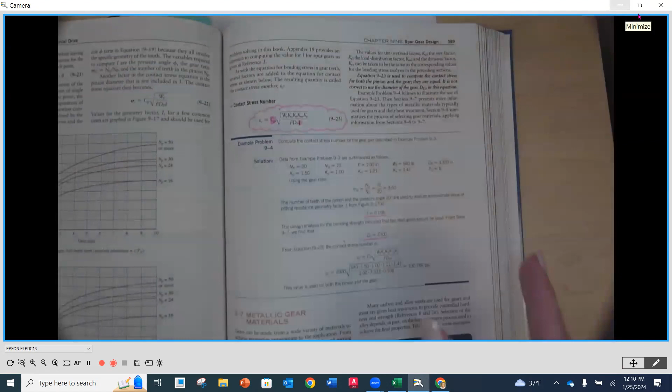Okay, and here's where we're starting, like I said, on page 389. Now 389 is where we have example problem 9.4, and example problem 9.4 is going to continue from example 9.3.

Example 9.3 looked at calculating the bending stress for the example that was started there. We went through different tables and charts, filling in the numbers specific to the application they described.

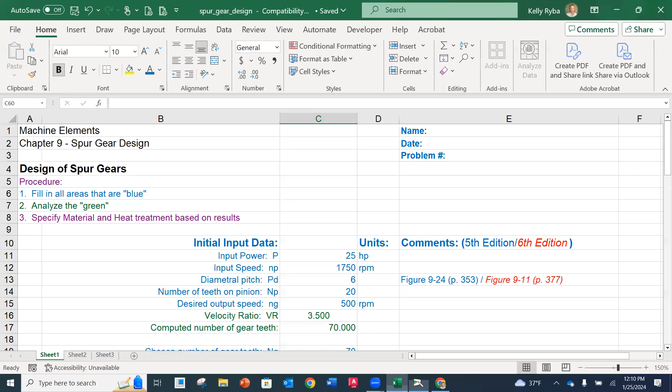We found on our spreadsheet, I'm going to bring that up here, the values we filled in in blue. There are some still open that we will go back and fill in as part of this, but right now we know what our bending stress is.

Remember, the bending stress on a gear tooth is due to that tangential force pushing on the tooth, transmitting that force from one tooth to the other. It's like that tooth is a cantilever beam wanting to push over. We need to know what that bending stress is so we can make sure our stresses aren't too high for the steel material we're going to use.

So first we have to calculate these stresses. We've got our bending stress. Now what we're going to do is find out what the pitting stress is for the same application. Remember, these two stresses are the big deal we want to know in gear design: what is the bending stress and what is the pitting stress.

Now, last time we talked about why I want to know these two values. I'll look to my chat to see if anybody puts anything in there, or if you're virtual, you can just yell it out if you want. Why are we interested in these two stresses?

Yep, they cause wear. Now wear is considered what? Starts with an F. I'm asking you to fill in my sentences, or think like I think. Not fatigue, not force — failure.

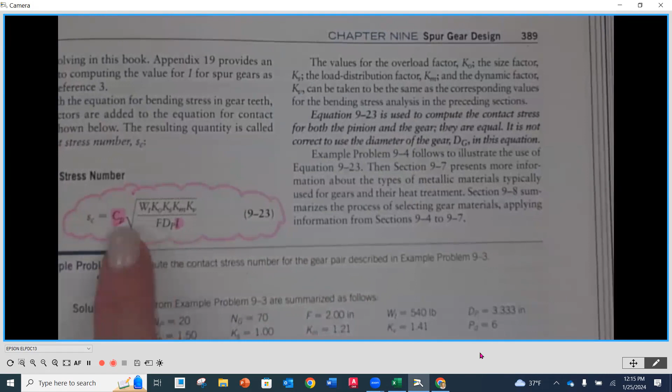We're going to be looking now at the stress caused by the contact, or what's going to be causing pitting on that surface—that's what example 9.4 is. Now going back underneath, right before this problem they have the equation for that pitting stress. You'll notice most of the variables there we used for bending, so the ones I don't have highlighted we've already been looking at. This stress C is called contact stress, but they also refer to it as pitting—pitting and contact stress are the very same thing.

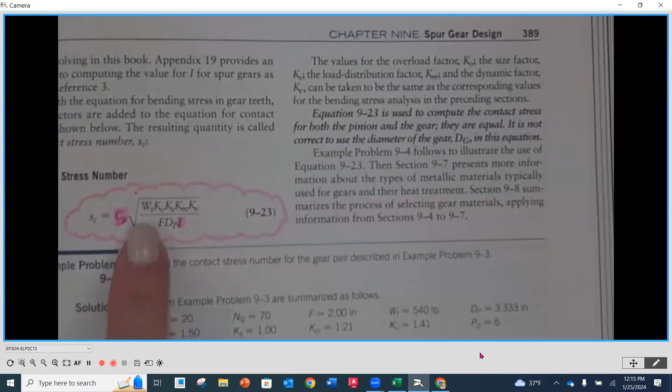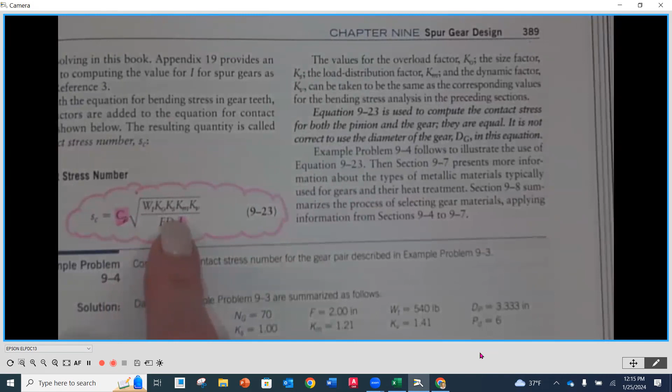WT is going to be that tangential force—that's the one pushing on that surface each time as it engages with that tooth and transmits that force, so that's part of what we're interested in. KO is an overload factor, size factor. The M was the... not the dynamics factor, that's V. The M, K, load distribution. Thank you very much.

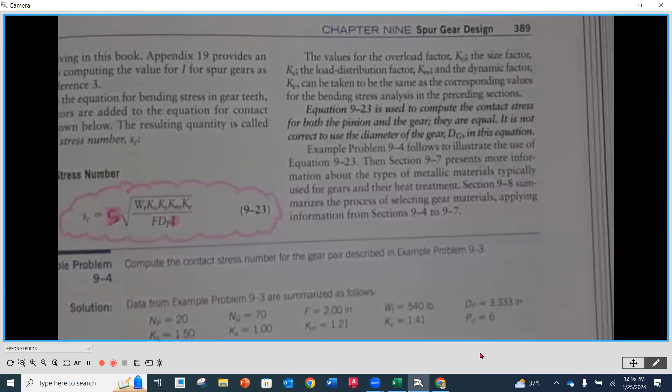Now underneath we have capital F—do you guys remember what capital F was? It was the face width. So face width is going to be that line for which we're going to distribute that WT, that tangential force. So the wider that tooth is, the less stress we're going to have. We're going to find out that as our teeth get larger, or that diametral pitch gets smaller, we widen out that face width, because we're distributing that force over a longer distance. And then you'll notice down here is that pitch diameter as well.

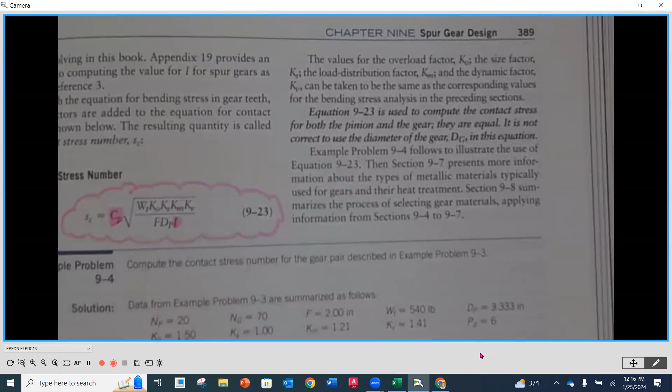So the two values here that we haven't encountered yet are CP and I. I is called a geometry factor—this is going to be one for pitting stress. We're going to read this off a chart, and it's actually going to be read off of a chart that's on the very previous page here.

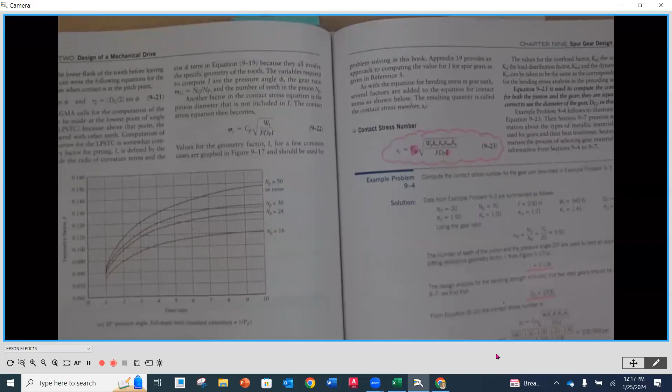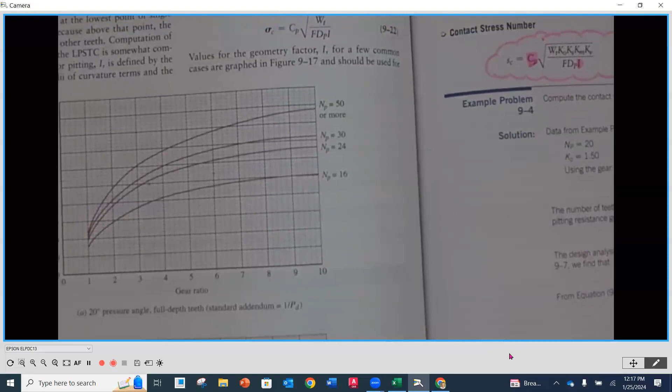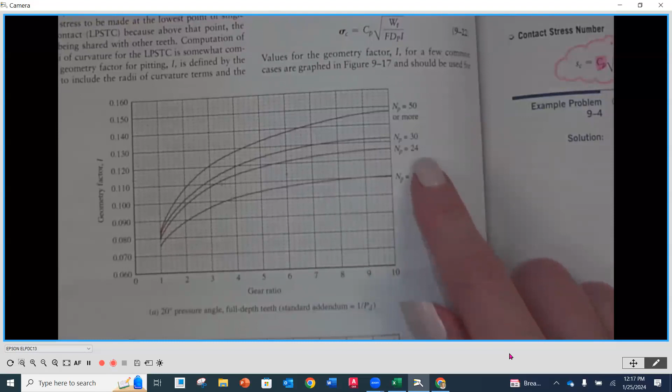On page 388 you'll notice we have two charts—the top one here is for 20-degree pressure angles, the bottom is for 25, so we're going to focus on the 20. To get this value for the geometry factor I, we need to know what the gear ratio is on the bottom here, which is part of what we calculated in the top portion of our spreadsheet. And then we need to know the number of teeth on our pinion. They don't have every one, so you'll have to interpolate—but for instance, for 16 teeth, we line up our gear ratio, find that intersection, and read our geometry factor.

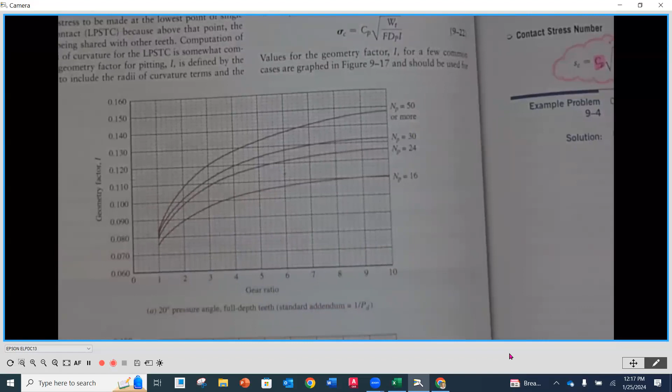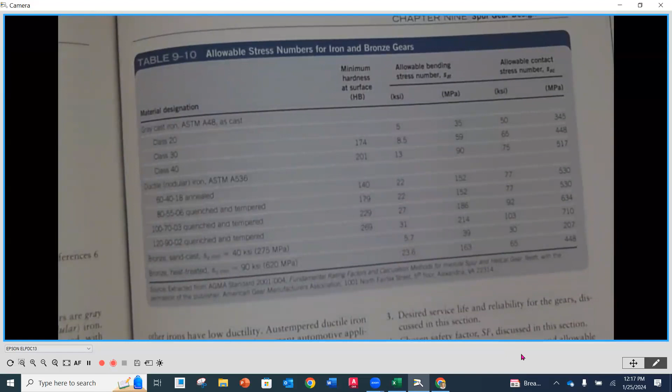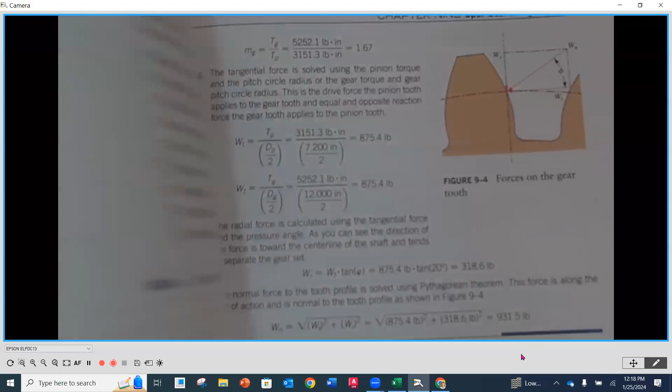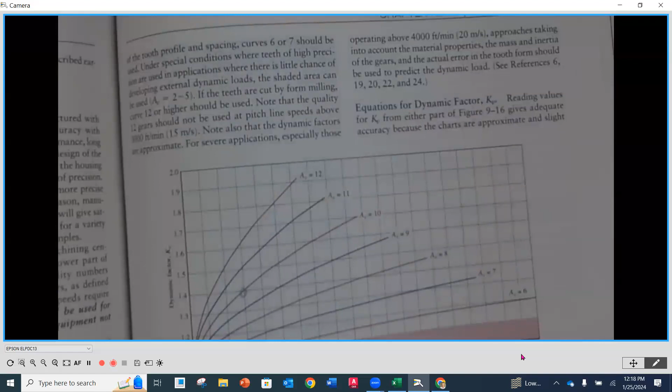Now CP is going to be a value based on the materials used for the gears. I don't know what the chart looks like, there's so many charts in here. The CP value—hold on, it's a little further this way. I wish they would just have a section where they all were, but I'm pretty sure it's 387. Down on the bottom—yep, there it is.

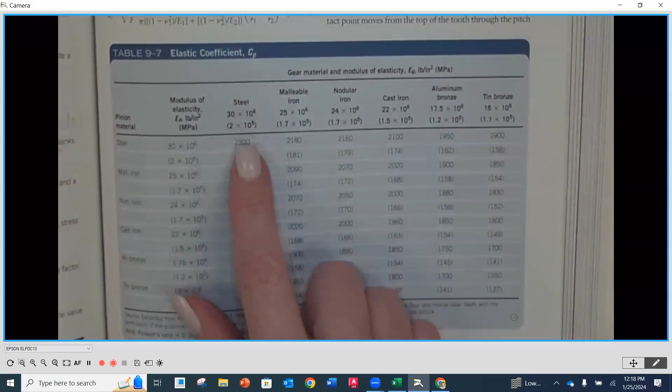So this is called the elastic coefficient, CP. What we do is find the material of our pinion—in our case we're going to be working with steel gears—and then we find the gear material of the gear. So where those two come together, steel and steel, we're going to be using that number.

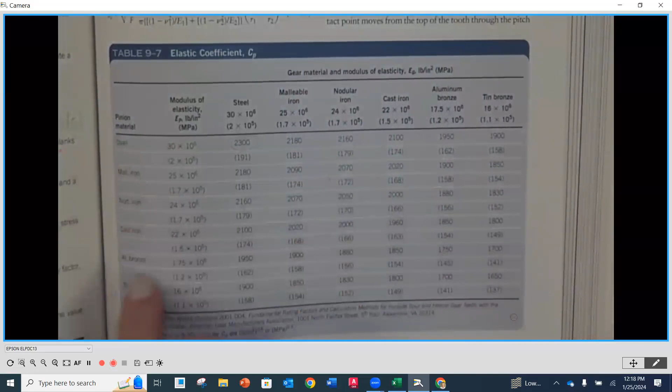If you had different materials coming together, or different materials in general, this number would change. Ours is going to be 2300 because we're assuming steel gears. So that's going to be the CP factor.

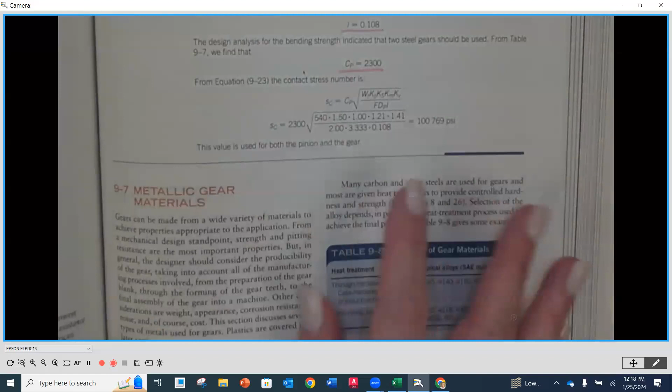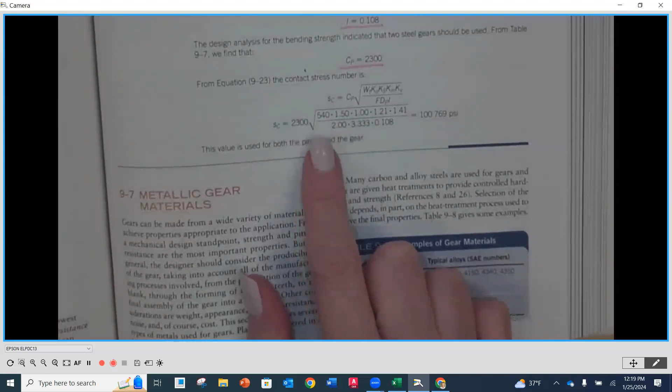You'll notice we just have a couple more things to fill in on our spreadsheet, and then we'll be able to find our contact stress. Let's go to this example and see where we're at.

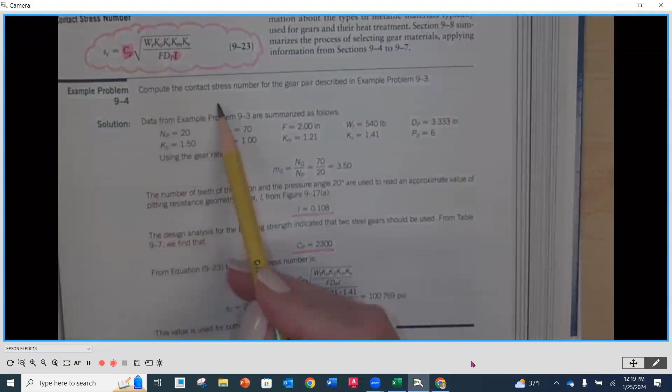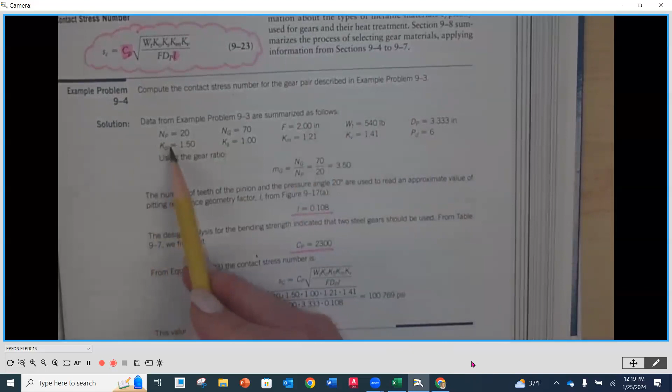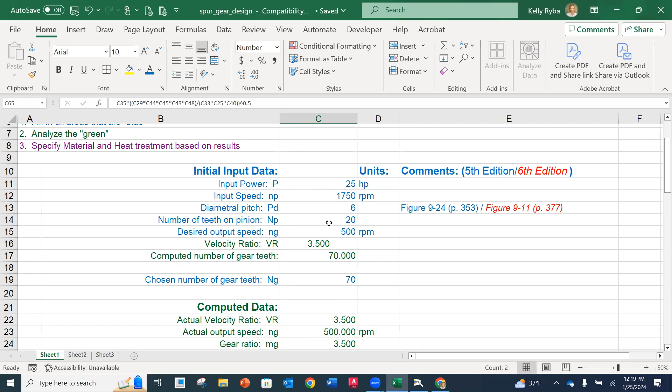It says compute the contact stress for the gear pair described in problem 9.3, and they have the data we collected from 9.3 here, so this is all familiar. If you didn't save your spreadsheet, you're going to want to fill these values in, the ones we did from yesterday: our horsepower, the input speed, the diametral pitch, number of teeth on our pinion, and so on—anything that's in blue here.

The ones we need to add are the I and the CP, and also our AV number, because we might have added that yesterday, I forget. It's 10, right? Because that was given in the original problem. So if you don't have it, put it in there.

Now CP, as we saw earlier, I'm just going to review—we have two steel gears, steel on our pinion and steel on the gear, so it's 2,300 for our CP value.

And then we're going to go down to I, the pitting geometry factor, and we're going to use that chart on page 388 to find our value. We need our gear ratio and the number of teeth in our pinion. Going back to the computed data, our gear ratio is 3.5 and the number of teeth on our pinion is 20.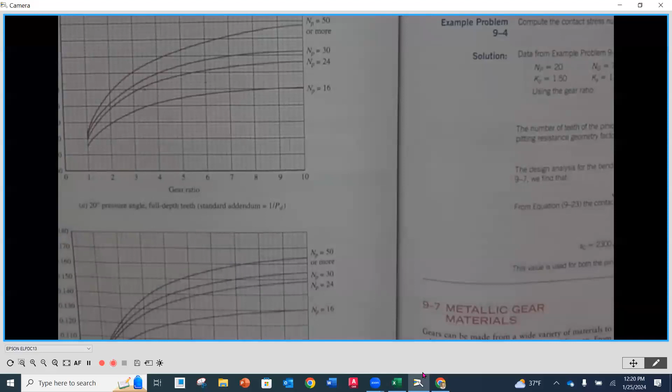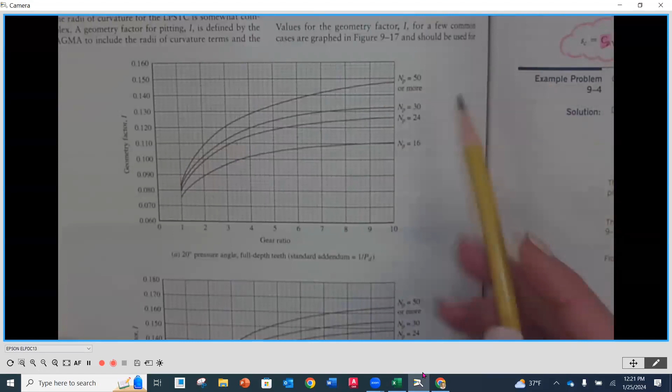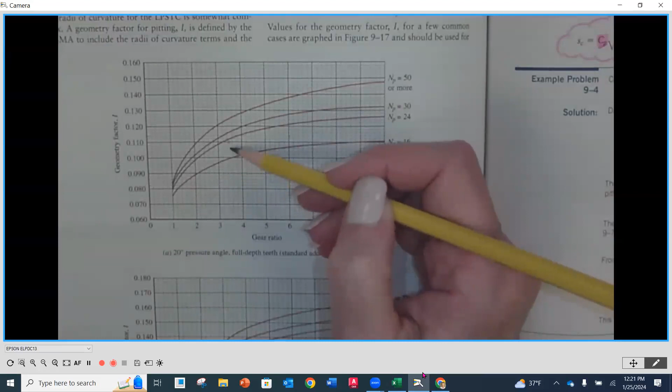So we're going to go back underneath here and fill it in, finding it on our chart. We're going to find where 3.5 is in between here, and go up—well, 20 isn't on here, right? So 20 is below, or in between these two, probably right in between. So I'm going to follow both lines down, and where I get to about 3.5, right about here in the middle. Then we're going to go over, and it's going to be right about here. So if we look, that's going to be 2, 4, 6, 8, 10.

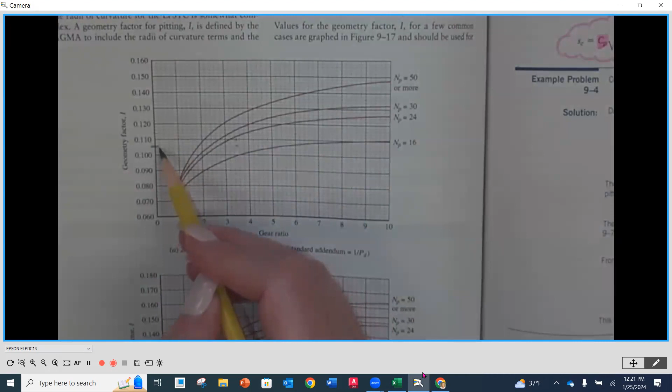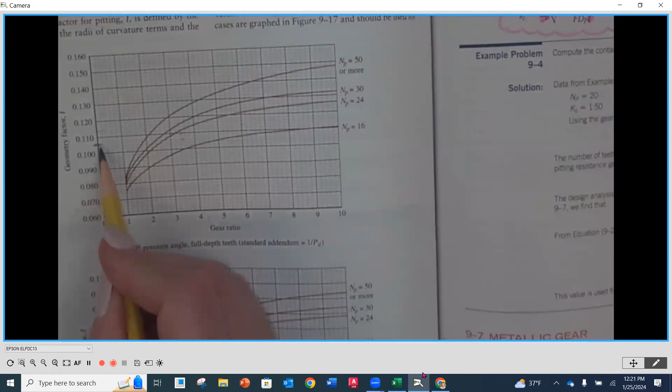0.125-ish—let's see what they used here. Oh, I'm sorry, 0.108. Let me see—oh yeah, that makes sense: 0.1, then 2, 4, yeah, 8. That's what they picked, so 0.108. I was going to the 100th place instead of the 1,000th. So in my spreadsheet, under I, 0.108.

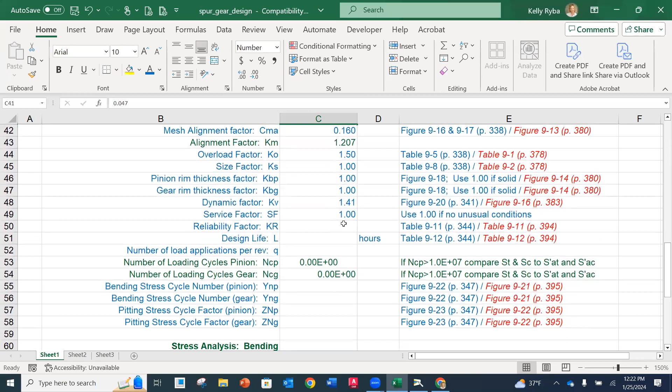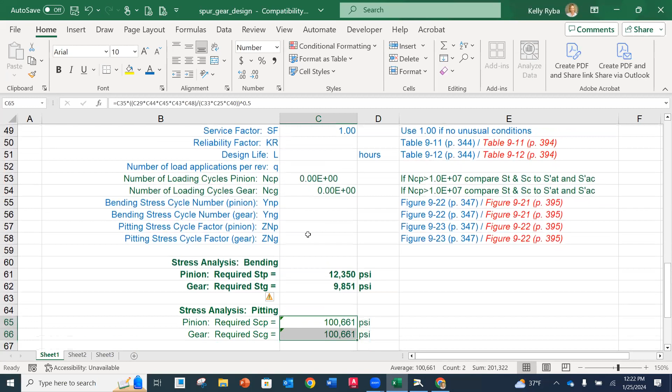Now we're going to go down and see if there's anything else we need to fill in, and our contact stress numbers are here. There are some fields we need to fill in, and we'll go back to that, but right now our stress number is right here, around 100,000 for our value. In the book, it's 107.69, but there might be some differences in rounding since they did theirs manually compared to our spreadsheet. Okay, Table 9.7, that last coefficient.

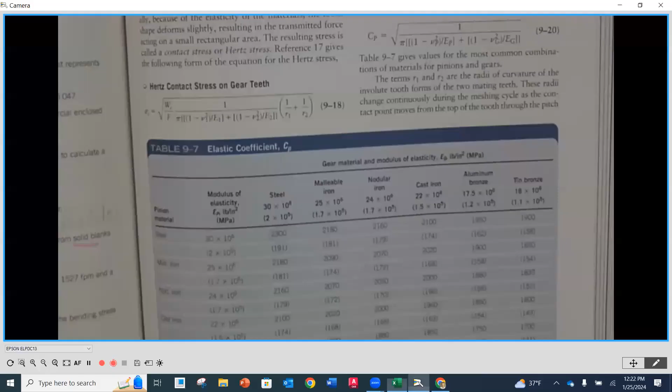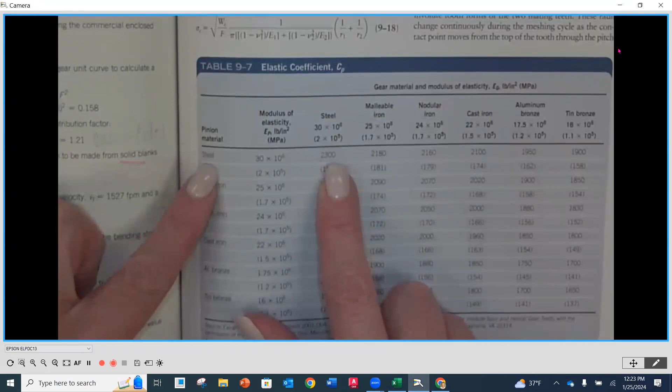I don't know if it's just me, but how do you read this? So down this column is what the pinion material is, down this column right here. That first column is just the pinion material, and all of these underneath are the options for gear material. So steel is here and here, so they come together at the 2,300. And the one below it would be metric.

Yeah, good question. That's okay.

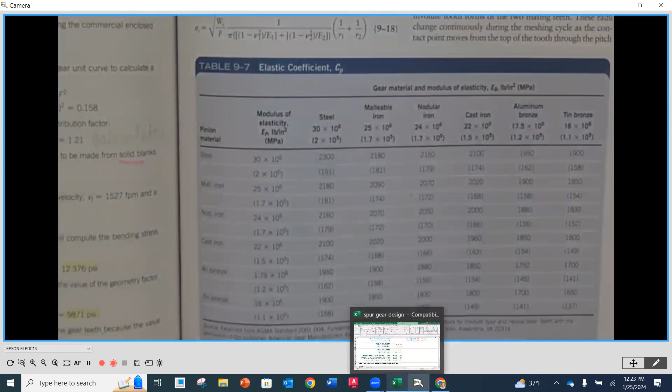Like I said, they're spread out all over this chapter because they do a little explanation and show it. I encourage you to go through each one, but it's sometimes a little bit—I don't want to say hard.

It's not hard to follow, but it's not convenient. So now we do have our bending stress numbers, and these are going to be the two values that we're interested in.

You'll notice that we do have some things that are not filled in. In this case, we don't have the reliability factor. This is going to come in when we start looking at quality-wise, how many failures do we want in 10,000 or 100,000. There's a chart we're going to read, but they didn't go that far with these two examples.

The next one we're going to be looking at is what are we expecting our design life to be in hours. We'll be adding that in the next example we do, and then we're also going to be adding the number of load cycles.

I'm just going to put some numbers in here, building on what's here, but we already completed example 9.3. So I'm going to put in a factor of 1.25. We're going to put in 20,000 hours and we're going to say 1 load cycle.

Now what happens is we start looking additionally at the number of load cycles on the pinion and the number of load cycles on the gear. So if we're expecting 20,000 hours out of this particular application, you're going to notice that the number of load cycles on the pinion is going to be 2 times 10 to the 9th.

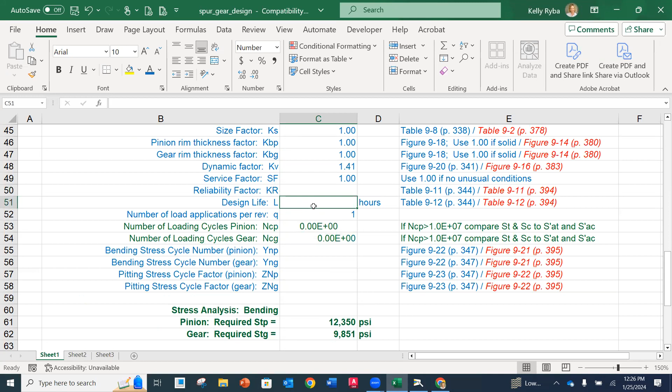So I'm going to take KR out of here, I'm going to take the life out, and I'm going to take the Q. So even though we didn't get all the way down to the bottom between examples 3 and 4, on our very next problem, we are.

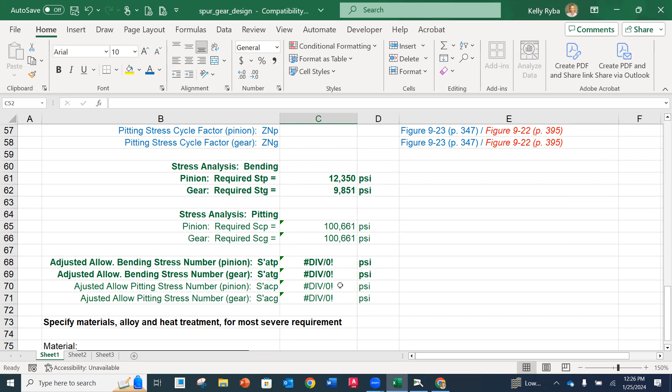So we will be finishing it up, if you would, with these adjusted values. For right now, they just wanted to know the bending stress number and the pitting stress number.

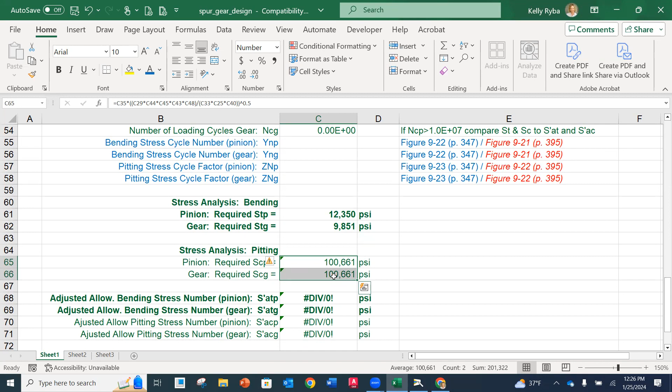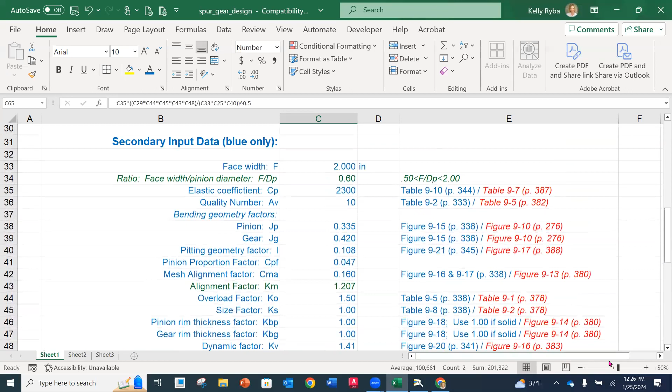So what I need you to do then is identify this as example problem 9-4, and then take your screenshots—probably 2 screenshots is appropriate. Again, one for the top, and then one for the section here, and then maybe even a third, just so that I can see the pitting stress number.

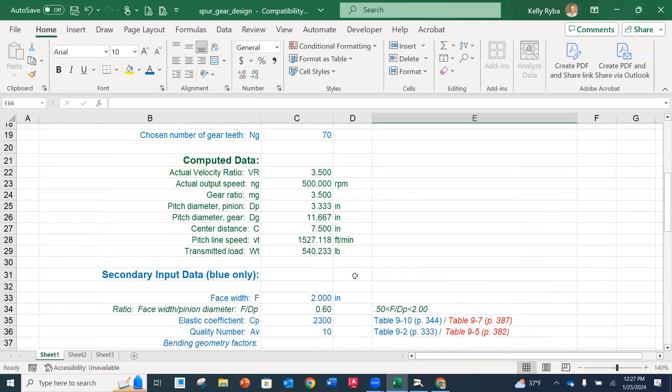Now, once you get that done, if you wanted to save, I would suggest saving this as example problem 9-3, so that you have it just in case it doesn't come through or doesn't get submitted. You don't have to redo it all.

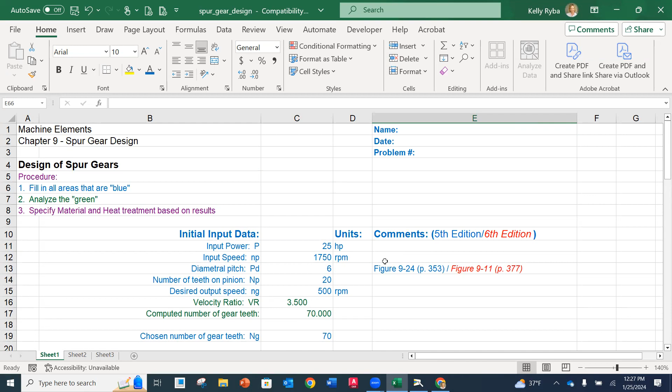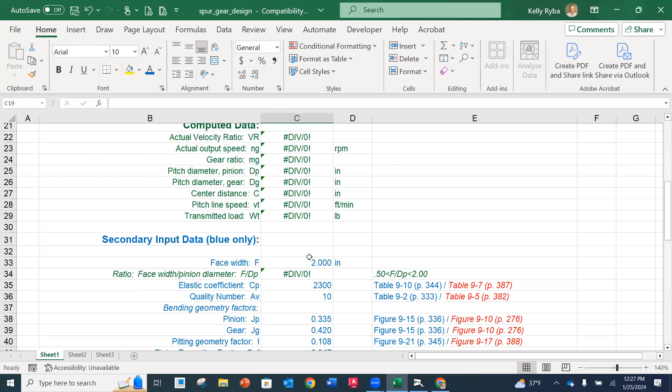But then once you have it saved, what I'm going to encourage you to do is erase the values in blue, because then what we'll do is start over and do a new problem.

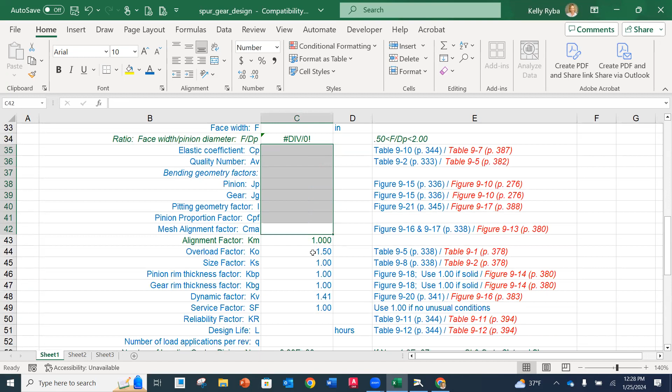Don't do the KM, that's a calculated value. Okay. And I think that's it.

And then just make sure that everything down at the bottom is good, or if you saved a clean copy somewhere, you want to bring that up. So that's example 9-3. Any questions on that?